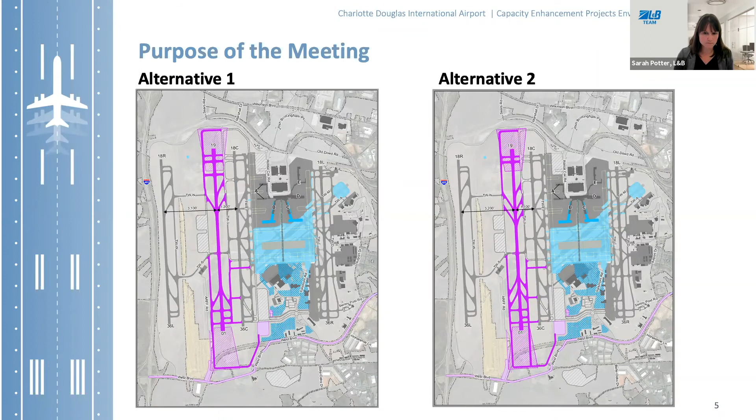All right, so the rest of this information I will tell you, for those who attended the previous presentation, is virtually the same. So you'll hear a lot of the same information.

So the roles and responsibilities in preparing the EA: the FAA is the lead federal agency, and they're ultimately responsible for compliance with the National Environmental Policy Act and also the scope and content of the EA. The FAA will also issue a decision on the EA and the implementation of the project. The City of Charlotte is the airport sponsor and is responsible for preparing the EA also in accordance with NEPA and all other regulations. The city leads all the public outreach for this EA too. Landrum & Brown, the consultant, works under the direction of the City of Charlotte and is preparing the EA also in accordance with NEPA, and we lead the work of all sub-consultants on the project as well.

So the purpose of an EA is to analyze and document potential environmental effects from a proposed action, look at the alternatives, and then develop any mitigation measures that may be needed from those impacts.

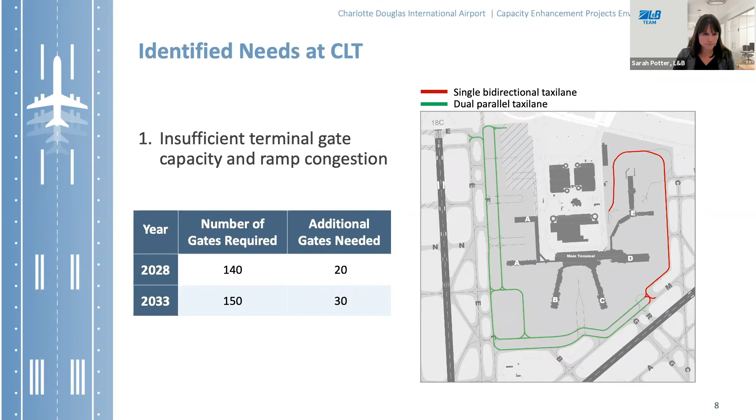The second need for the project is addressing insufficient runway capacity to meet future demand at acceptable levels of delay. An acceptable level of delay for this project was defined as an all-weather average of 7 minutes of runway delay per operation.

We conducted airfield simulations to understand the level of runway delays currently occurring at Charlotte. The simulation showed that the number of aircraft operations the runway can process, the throughput, increases by 13% between 2016 and 2028, whereas all-weather average delays increase by 21%. These changes demonstrate that the runway system can achieve greater throughput beyond the 2016 operation level, but does so at rapidly increasing delays. As a result, it's reasonable to conclude the Charlotte runway system was approaching capacity in 2016.

Between 2028 and 2033, throughput increases by only 4%, but delay increases at a much more rapid pace, 24%. This relationship between throughput and delay shows that the runway system reaches capacity around 2028.

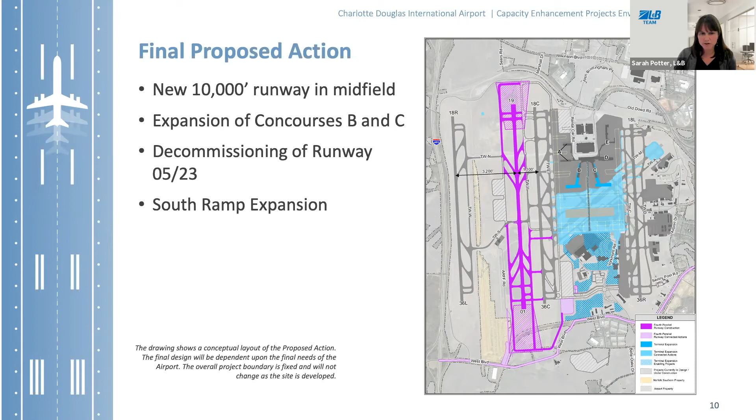When looking at alternatives, the Council on Environmental Quality requires that an EA explore and consider all reasonable and feasible alternatives to a proposed action that also meet the purpose and need, and could possibly do so with lesser environmental impact. As a result, the EA conducted a thorough and objective assessment of alternatives.

This analysis was posted in a virtual presentation back in December 2020 to the project website. That presentation described each of the alternatives, which you'll also see in this presentation, that were carried forward in the EA for potential environmental impacts.

The Council on Environmental Quality also requires that the no action alternative be carried forward in an EA, even though we know it does not meet the purpose and need of the project. The reason is that no action is used as a basis of comparison, so you compare each alternative back to the no action to understand the level of impacts from each alternative.

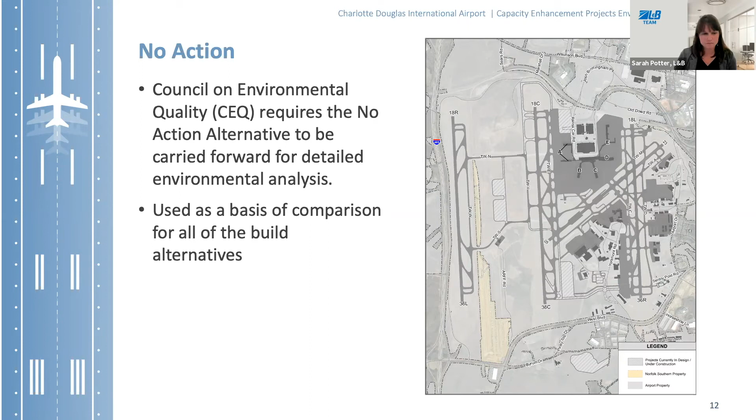That's on the north side of Concourse A, the existing Concourse A. There's also the north end-around taxiway on the existing center runway. There are hold pads located out in the west midfield, a de-ice pad on the south airfield, and also a crossfield taxiway.

In the no action scenario, operations are assumed to continue increasing at the same levels forecasted for all the other alternatives. The airport would continue to experience increases in delay with the existing runways in place, and would also experience continued congestion in the terminal area and a shortage of aircraft gates.

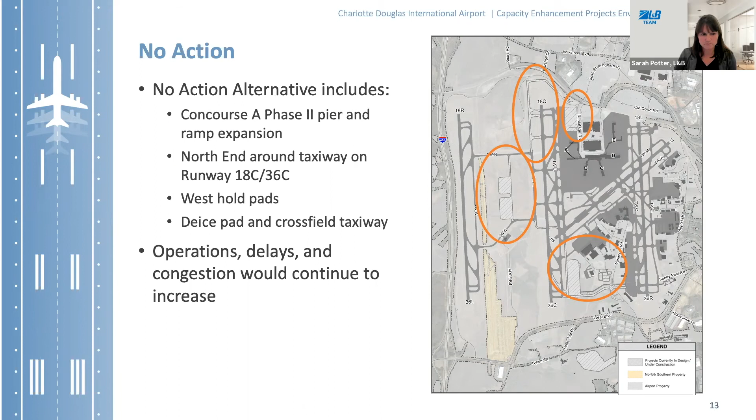All right, let's go through each of the alternatives that were looked at. Alternative 1 included a new runway in the midfield, along with north and south end-around taxiways. The runway would be 3,100 feet east of the west runway and 1,200 feet west of the center runway.

This alternative also includes expansions of Concourses B and C, crossfield taxiway corridors with ramp expansion to the south, closure of runway 5-23, and dual taxi lanes all around the terminal area.

This new runway is assumed to be primarily used for departures, therefore it's a 10,000-foot runway. That's based on the capacity analysis describing the need for 3 simultaneous arrival runways. So arrivals would land on the west runway, the existing center runway, and the east runway, while departures would primarily occur on the new runway and also the east runway.

Alternative 2, the proposed action, is very similar to Alternative 1. The big difference is the location of the new runway, shifted 100 feet to the east. This runway is also assumed to be primarily a departure runway, so it's 10,000 feet long. Runway use would be virtually the same as Alternative 1: arrivals on the west runway, the existing center runway, and the east runway, with departures primarily on the new runway and the east runway.

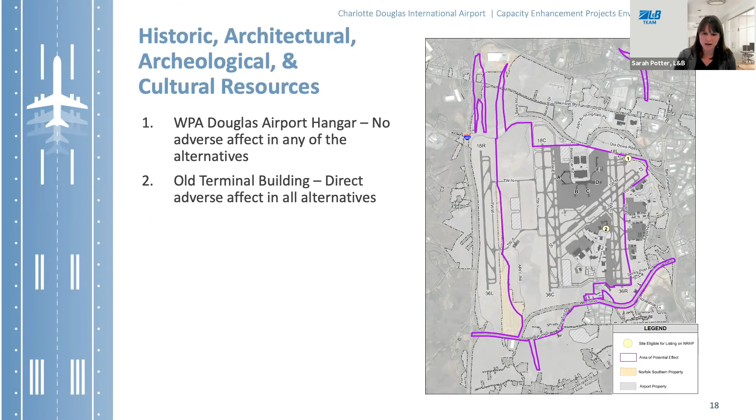All right, the next category is the U.S. Department of Transportation Section 4(f). These are resources which are publicly protected. They include publicly owned parks, recreation areas, wildlife and waterfowl refuges, and historic sites of national, local, or state significance.

So for the 4F resources in this study, we used the same area that was used in the historic analysis. You can see that area in purple, and that is our study area. As previously described, there are 2 historic properties located within this boundary, the WPA hangar and also the old terminal building. Those are both considered Section 4F resources. There are no other 4F resources within this purple boundary.

So when discussing Section 4F impacts, there are 2 types that you look at. The first is a physical use, and the second is a constructive use. A physical use would occur when the action involves actual physical taking of the property. A constructive use would occur when impacts on the property are so severe that the activities, features, or attributes that qualify the property for 4F are substantially impaired.

So implementation of all the alternatives was determined to have a physical use on the old terminal building as it's going to be removed. The WPA Douglas Airport hangar was determined it would not have a physical or constructive use with the implementation of any of the alternatives. So as previously described, to mitigate that impact, the FAA and North Carolina Historic Preservation Office have entered into a memorandum of agreement to address that.

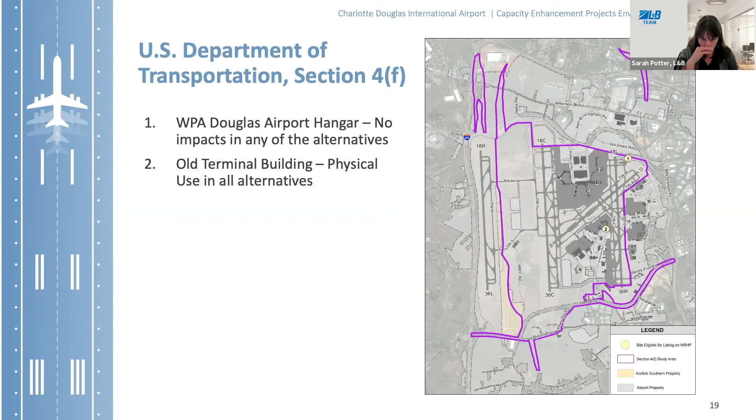All right, moving on to noise and noise compatible land use. So a significant impact would occur if an action or an alternative would increase noise by 1.5 decibels or more

for a noise sensitive area within the 65 DNL or more. So for example, if a noise sensitive facility had an increase from 65.5 DNL to 67 DNL, based on FAA regulations, that would be considered a significant impact. And that would go the same if it was 63.5 to 65. So that would also constitute a significant impact.

Now, just because a noise sensitive facility is located within a 65 DNL noise contour does not necessarily mean it's significantly impacted. It would have to also be within a 1.5 dB increase area.

So the FAA requires that we use a model called AEDT to determine what the noise contours are for the no action and also for each of the alternatives.

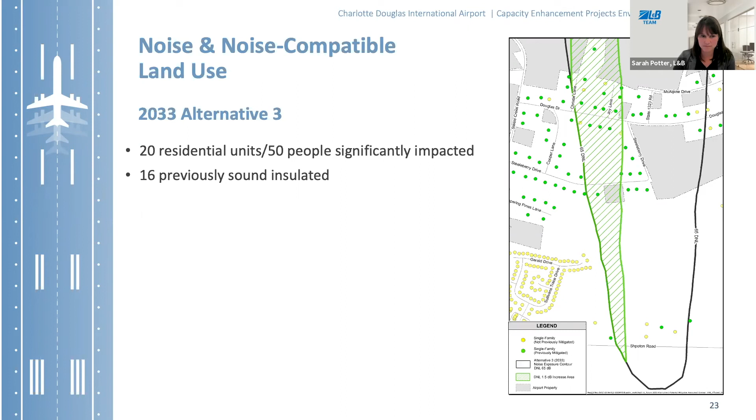The construction of all 3 alternatives would result in impacts to approximately 5 acres of wetlands and 8,150 linear feet of streams. Those impacts would require an individual permit from the Army Corps of Engineers, and would also require mitigation through the purchase of stream and wetland credits from the Charlotte-Mecklenburg Stormwater Services Umbrella Stream and Wetland Mitigation.

There are also 13 acres of 100-year floodplain that would require coordination with FEMA and remapping of the floodplains. That's located on the south, just to the east of the new runway.

There's also an additional 211 acres of new impervious surface from the ramp expansion and the runway. This increase in impervious surfaces would be accommodated through the airport's existing stormwater system.

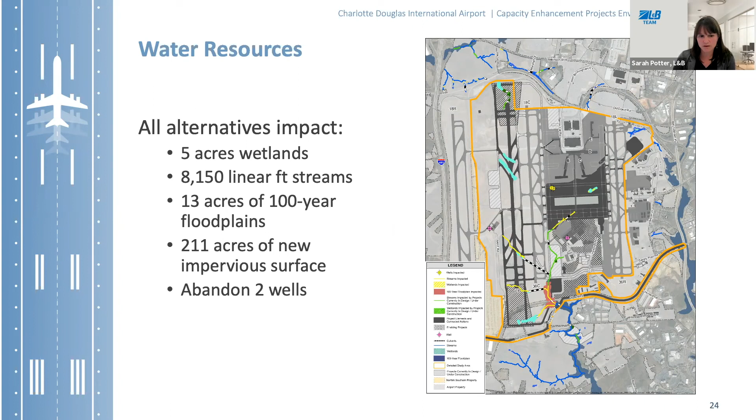And then lastly, there are 2 wells located just south of Concourse B. Those would need to be abandoned, and they would be done so in accordance with any federal, state, or local requirements.

So in summary, Alternative 1 and Alternative 2, which is now the proposed action, would have no significant impacts on any of these environmental impact categories. However, Alternative 3 would have impacts on residential units from noise.

As everyone knows, we're still experiencing COVID. The pandemic is still in effect, and we're still dealing with all the ramifications of what's going on. However, the industry has always bounced back from every other major incident that has occurred.

When we looked at FAA TAF forecasts, the terminal area forecast predicts that operations return to 2019 levels around the year 2024 for the entire US, generalizing nationwide. However, what we're seeing at Charlotte is that operations are only down about 5% from September 2021 compared to September 2019, so they're tracking very closely to 2019 operation levels and passengers.

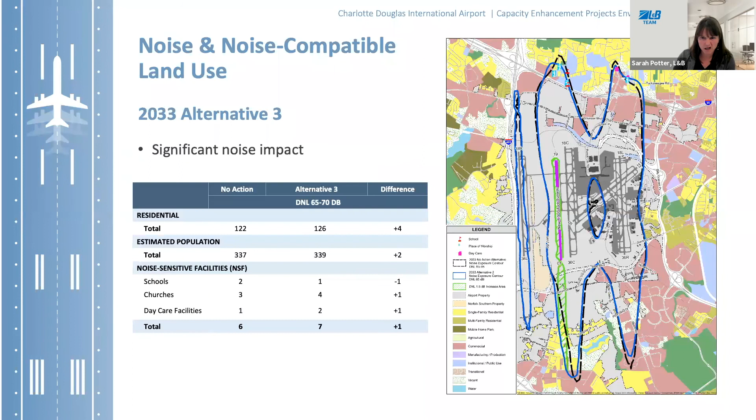The first question is, why are there no departures on runway 36 left? Let's go back to a diagram so everyone can see the alternatives. Okay, so 36 left is the westernmost parallel runway here, and that is an arrival runway. It's only used for departures probably in an emergency, very, very rarely. It's almost entirely used by arrivals. So maybe I misspoke when explaining one of the slides, but that western runway is an arrival runway, and that continues throughout all of the alternatives—that's the assumption we used.

The next question is, is there a cap on how many flights will throughput? There is no cap. That is not something Charlotte does or the FAA does at Charlotte, and in the future that is not assumed to occur either. That was not part of our assumptions. Jack, I don't know if you want to add anything to that.

That's correct, Sarah. The airport is a public infrastructure and has to be available for any and all activity based on the requirements of the FAA.

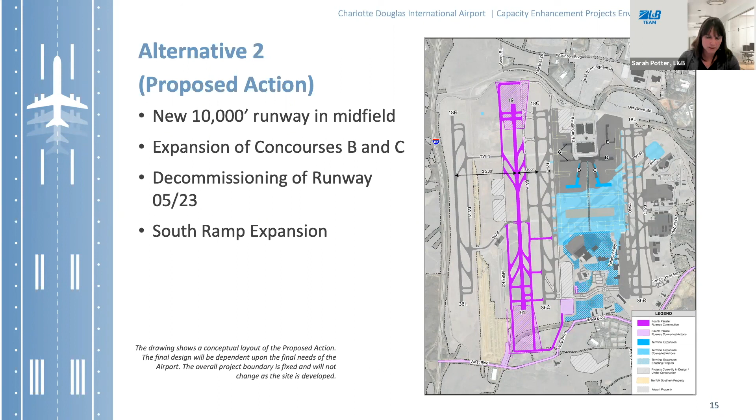Last question: what was the rationale for decreasing the runway length from 12,000 feet to 10,000 feet? In the EIS, the original proposed action was 12,000 feet. That length was based on an analysis using forecasts completed around 2016, maybe a little earlier. Since then, the forecasts of operations have been updated, and through that update they looked at what the fleet mix would look like—what type of aircraft would fly at the airport. Based on the fleet and type of aircraft, it was determined that the critical aircraft—the aircraft you look at to determine runway length, based on FAA guidance you're supposed to follow—only needed 10,000 feet. So at that point, 12,000 feet could not be justified, and the runway length was reduced to 10,000 feet.

Next question: is there a correlation between the length of runway and noise levels? Sometimes not. There are many factors that go into noise levels. Those have to do with the runway length—the threshold on the runway where the aircraft starts its takeoff and where it actually lands. It also has to do with the type of aircraft using that runway, the number of operations on that runway, and flight tracks. So there's no one factor that ultimately determines the noise contour at an airport. All of those factors are inputted into the noise model, and that is how the noise contours are determined.

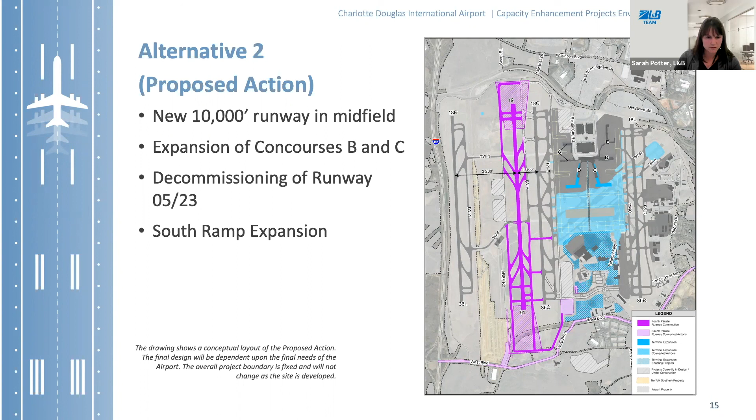If anybody has any additional questions, we can stand by and give a few minutes to see if there are any. Otherwise, we're going to take an intermission until 3:30, when the public hearing will start. The public hearing is an opportunity for everyone to orally submit their formal comments. Just so everybody's aware, there will be no responses given during that public hearing—it's just a way for you to orally give your comment, and we'll have a court reporter who will transcribe everything and make sure to have it in the official record. But there will be no formal question and answers during that time.